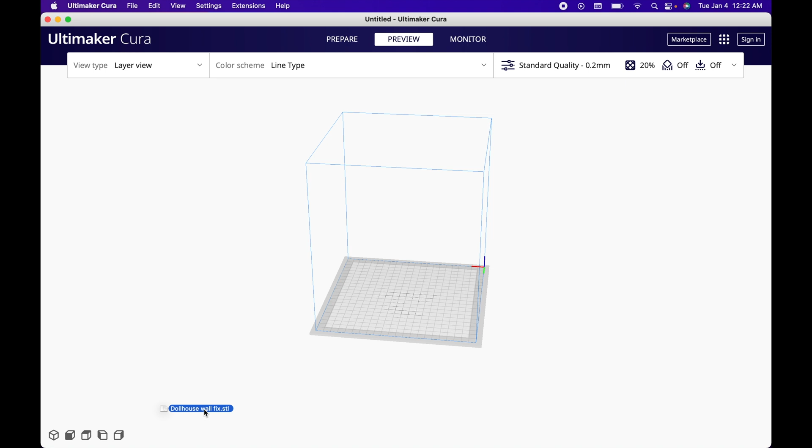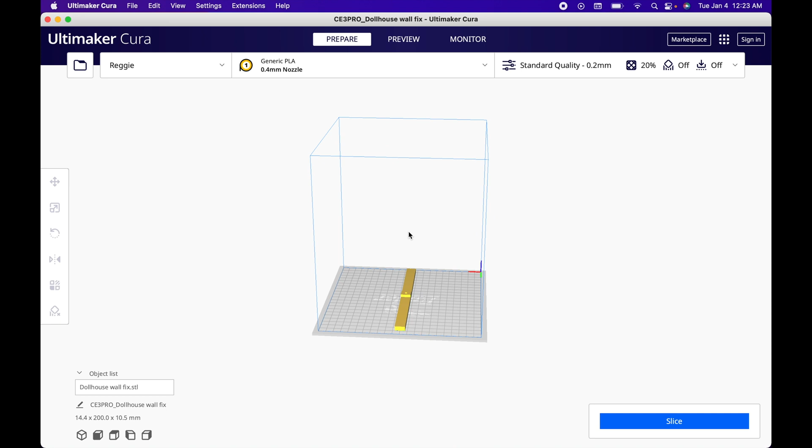Okay guys, now that we got Cura open, we're going to drag our part over. As you can see, that's going to print on our bed. The reason I went with the length I did is because I knew it would fit within this size. Once I get it down to the part I need, I actually need 8 of these, so I can just stack the rest side by side and print them all without having to do them individually.

Now that we've got this in the system, we're going to come over to our settings and what your individual printer is capable of. We will set the quality - since this isn't going to be seen and it's all straight lines with no fine details, low quality should work great. That's just 0.28 millimeter layers. We will leave all of this the same.

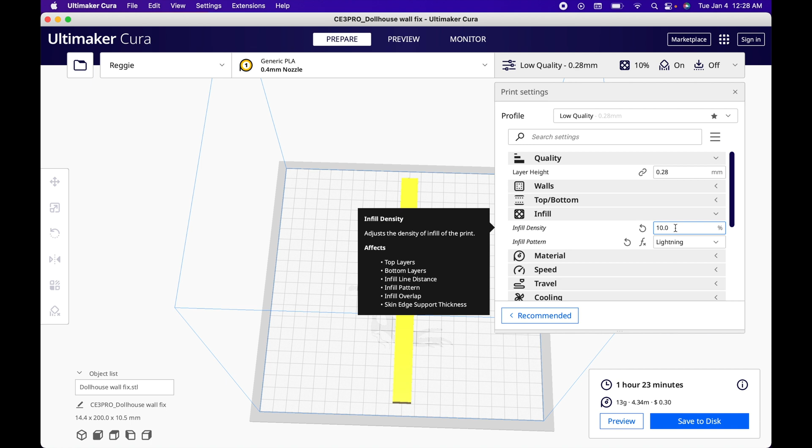Under infill, there's a section showing the density. Since this isn't requiring a whole lot of strength, I think 10% should be good. For infill pattern, I'm going to go with cubic - I feel like that's a very strong pattern, especially for a part like this. That's something you can play around with as you use these settings and figure out the different ones you like. But cubic in general is one I think has a lot of strength, and it's what I use for most of my stuff.

Everything else through here is going to be pretty specific to your printer and the material you're using. You will just pick that up over time.

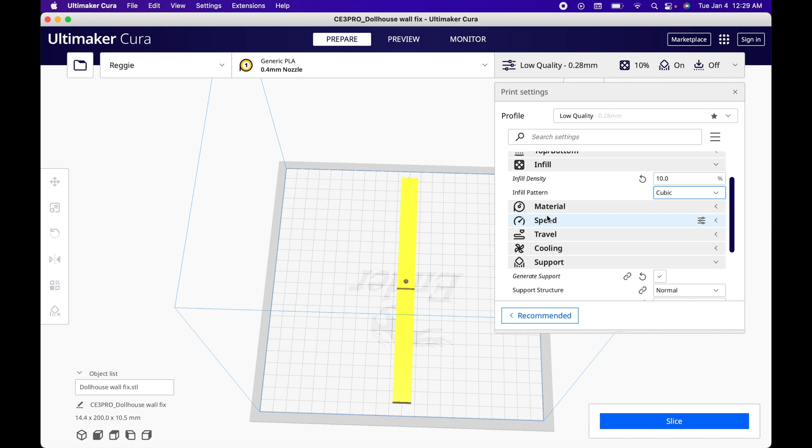Now, there's only one part that I'm worried about needing support, and it's actually this bottom part. You can see that red section - that tells us there's a drastic overhang and you could have issues there. So I'm going to generate support, and looks like everything else is good here.

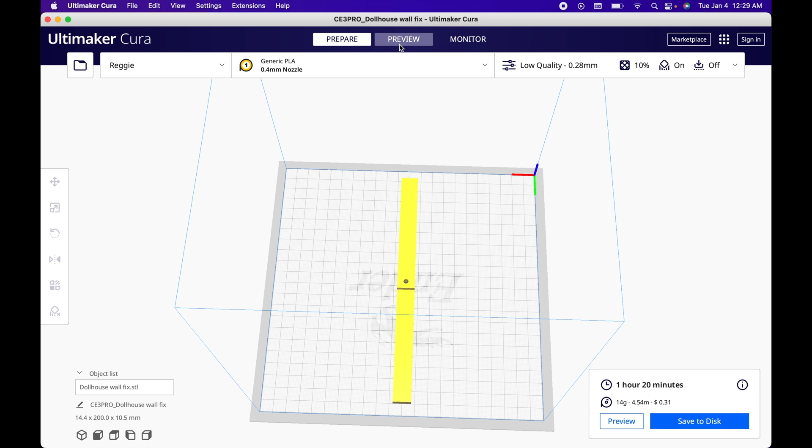Okay, then we're going to hit slice, and that's telling us it will take about an hour and 20 minutes, and about 31 cents worth of filament. We can go to preview, which allows us to look at each step of the process to see what our infill looks like. You can see this red here is the infill on the inside before you start getting your top layers down. So I am happy with that.

We're going to throw the SD card into the computer, and then once it pops up, hit save to removable drive and then eject.

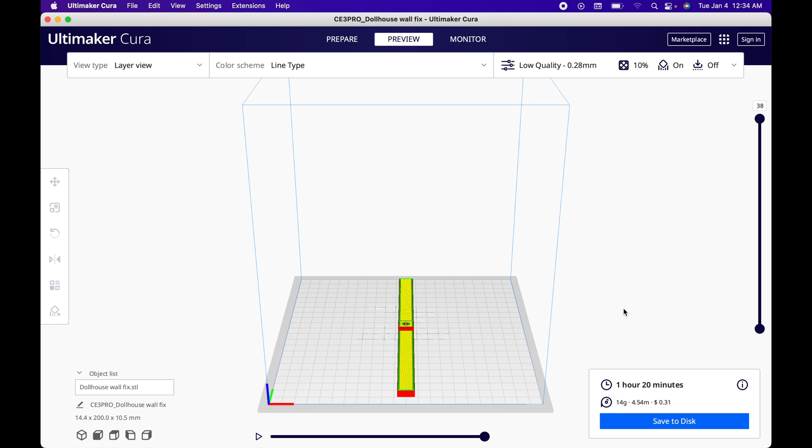In the next video, we are going to get it loaded up in the printer, get our bed level, and get everything ready to actually get this print started.